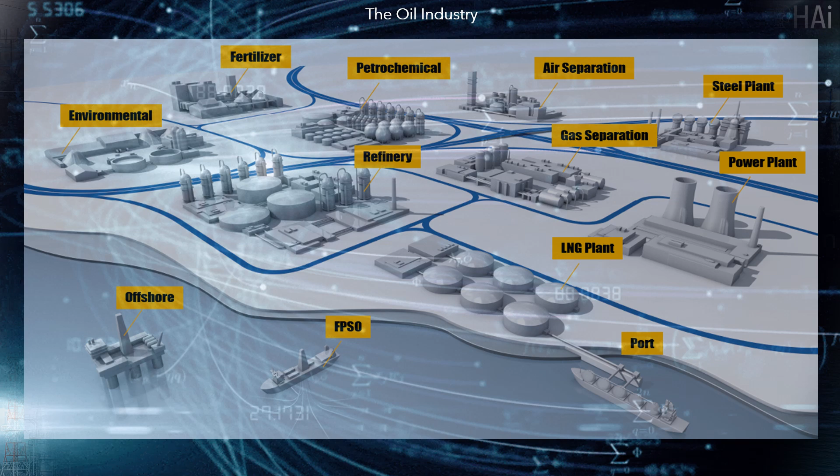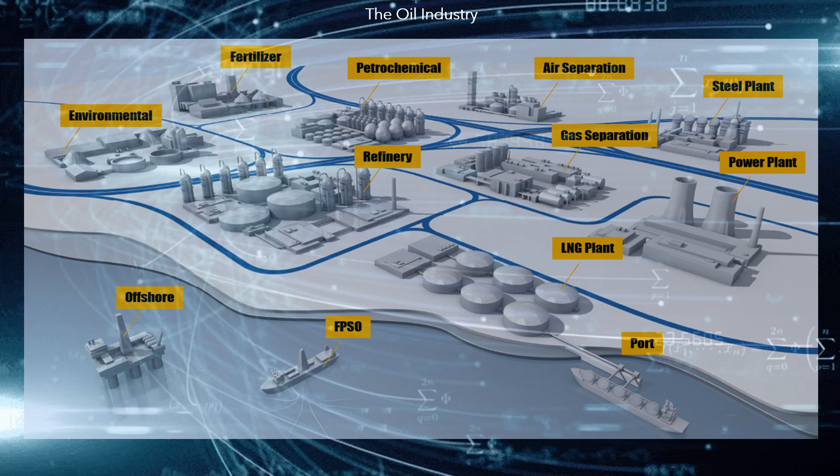Oil Supply Chain Optimization: the oil industry includes global processes of exploration, extraction, refining, transportation and marketing of petroleum products. The largest volume products in the industry are fuels, natural gas, fuel oil, and gasoline. However, petroleum is also the raw material for many chemicals, including pharmaceuticals, solvents, fertilizers, pesticides and plastics.

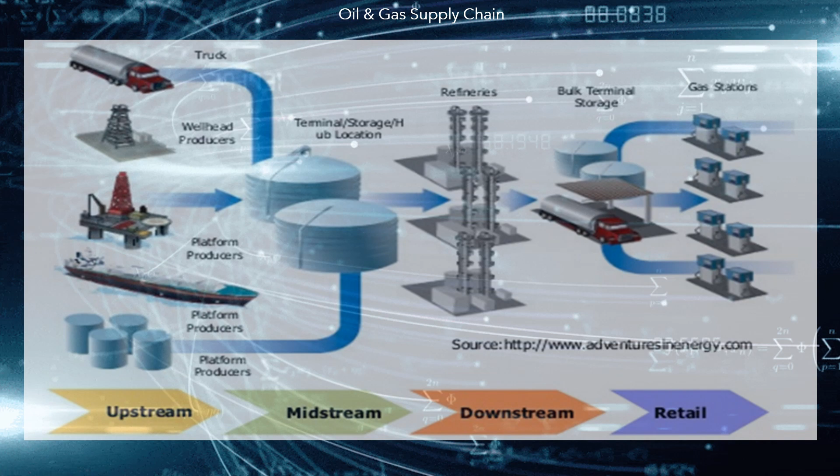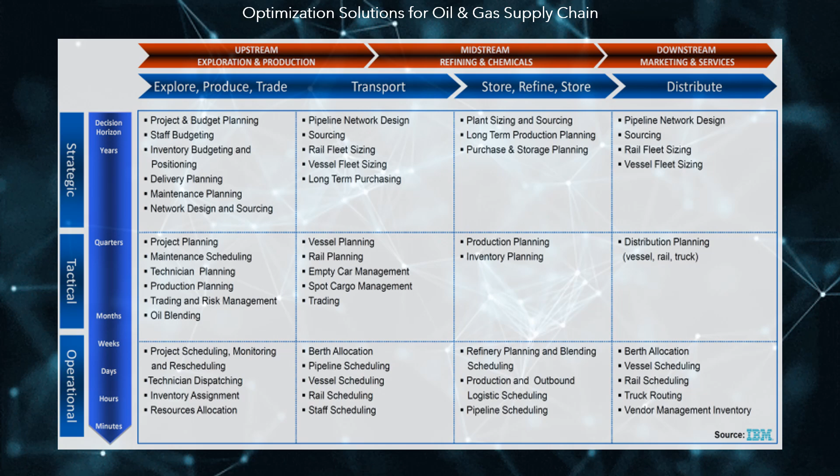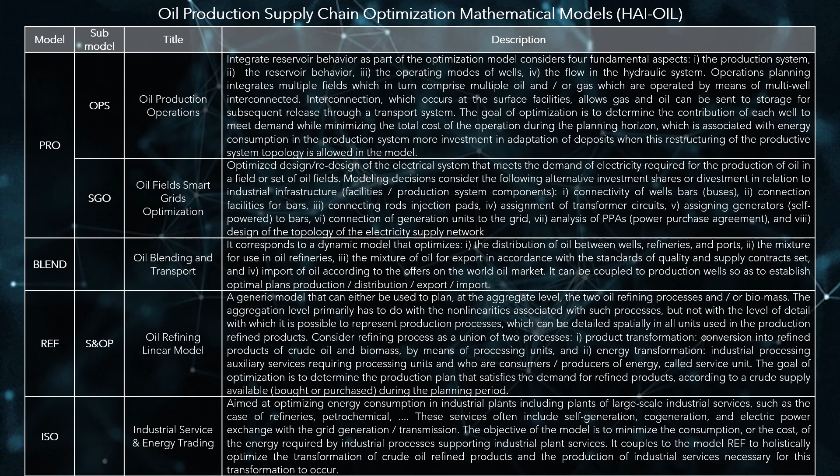The oil and gas supply chain is made up of four links: upstream, midstream, downstream and retail. The links are connected by multimodal transport networks. The table, elaborated by IBM, shows a summary of the optimization solutions for oil and gas enterprises. Oil supply chain optimization meets all the software solutions developed by HAI, in different areas of application of mathematical optimization models, oriented to planning and to scheduling operations in different businesses of the petroleum product supply chain.

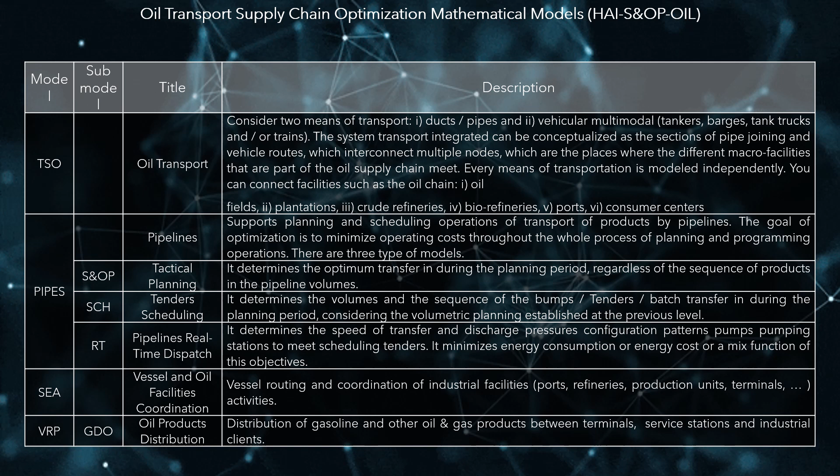The table presents a summary of the oil production and transformation mathematical models developed by HAI. The table presents a summary of the oil transport mathematical models developed by HAI.

Oil Enterprise-Wide Optimization integrates mathematical models for each of the links in the oil supply chain, in such a way to manage the planning of the supply chain with a holistic vision. The design of HAI Oil EWO was the result of work done for a multi-business oil company. The union of models, and their coordination, forms the hypothalamus of an oil enterprise.

Oil and Gas Production Optimization integrates reservoir behavior as part of the optimization model. It considers four fundamental aspects: production system, reservoir behavior, operating modes of wells, and flow in the hydraulic system.

The objectives of optimization models depend on the planning horizon, and can be divided into: real-time advanced control and scheduling for short-term production optimization; medium-term field optimization for strategic operations planning; long-term planning for reservoir recovery optimization; and strategic investment planning and portfolio optimization in oil exploration and production.

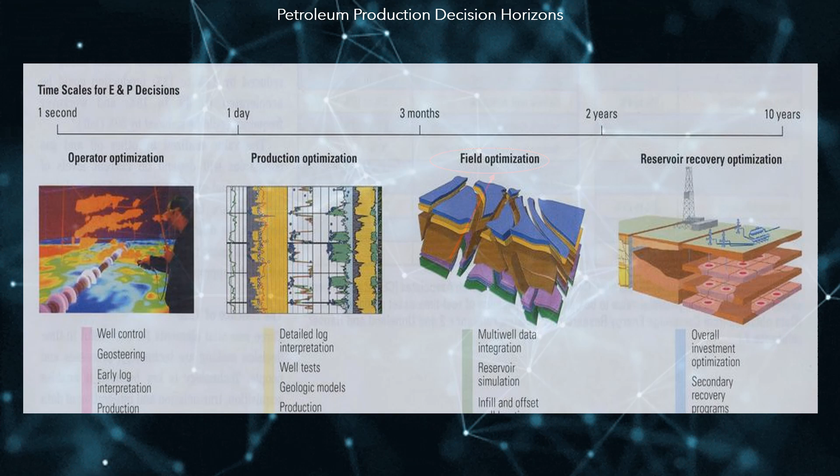Operations planning integrates multiple fields, which in turn comprise multiple oil or gas wells, operated by means of interconnected multi-wells. This interconnection, which occurs at the surface facilities, allows gas and oil to be sent to storage for subsequent release through a transport system. The goal of optimization is to determine the contribution of each well to meet demand.

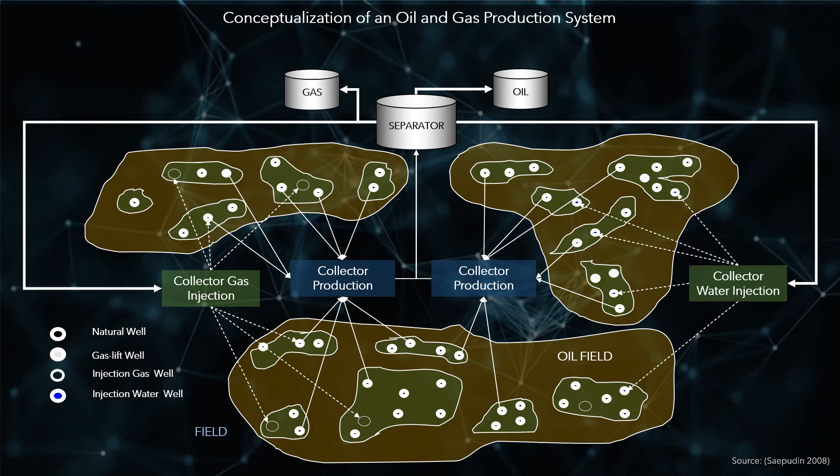This is done while minimizing the total cost of the operation during the planning horizon, which is associated with energy consumption in the production system, plus investment in adaptation of deposits, when restructuring of the productive system topology is allowed in the model.

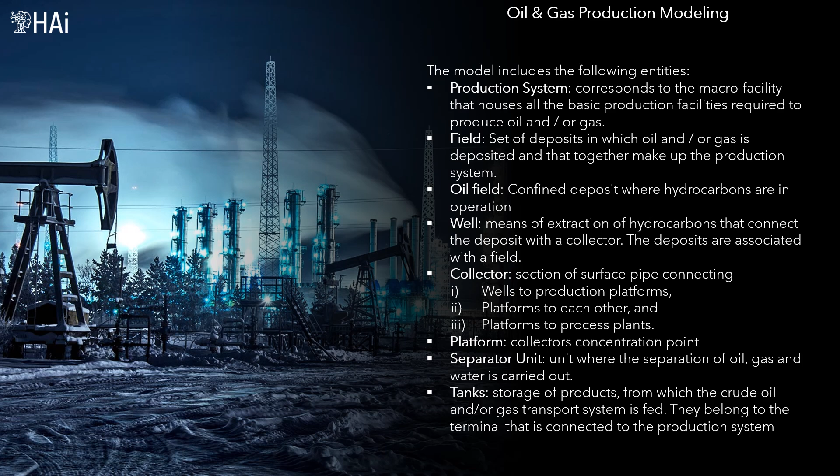The model includes the following entities: production system, field, oil field, well, collector, platform, separator unit, and tank.

For the modeling of the hydraulic system, reservoir plus surface facilities, it is assumed that the production of a well remains constant during each period, and that its production capacity is restricted by several factors: reservoir dynamics, energy conservation, and matter conservation, as well as the behavior of the pressure at the wellhead with respect to the reservoir, characteristics of the well pipe, and characteristics of the pipe of the collectors.

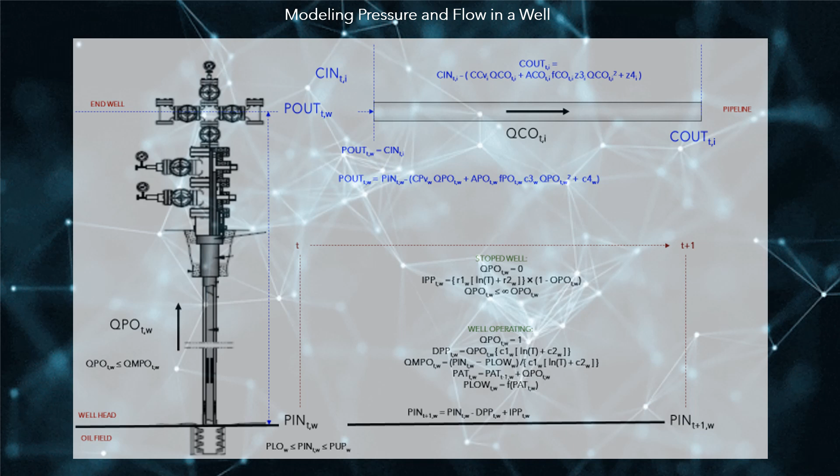The central variables of the modeling represent the flow in the wells and the flow in the collectors. This flow may be multi-phase, in the case of crude oil deposits, and single-phase in the case of gas fields. The diagram summarizes the connectivity of the mathematical elements that allow modeling the well, in the aspects related to the pressure and flow of hydrocarbons, along the hydraulic system that is part of the production system.

E&P portfolio optimization is based on the capitalization of knowledge, of the interaction between potential projects and existing projects. The aim is to obtain most of the answers required for an optimal decision-making process, so that decision-makers can answer, among others, the following questions.

Is it possible to obtain an expected level of return on investment, without incurring serious cash flow risk? How much can we invest in a new project, given the current structure of the investment portfolio?

How do oil-oriented projects affect, in contrast to gas projects, the price risk associated with the investment portfolio? How does global political instability affect the risks associated with the investment portfolio?

Analytical models will help directly in the solution of questions like the above, once decision makers become comfortable with the holistic perspective supported by the mathematical quantitative risk analysis.

The mathematical models that may be integrated are: optimization of E&P investment portfolio, design of oil production networks, and oil and/or gas production optimization. Smart grids and oil production fields optimization is a new activity of the oil industry.

The technical economic viability of energy storage, coupled with the proliferation of renewable energy sources and technologies, has changed the landscape of the industrial sector, since it is now possible, and increasingly efficient, to generate renewable energy and store it for use in due time.

The industrial energy efficiency strategy implies two stages. Offline optimization, planning, is integrated by 3 steps. First, redesign the energy supply system.

Optimize the industrial process in the plants using complex mathematical models, and integrate the planning and scheduling of the industrial process, matter transformation, with the industrial services, energy transformation, including the transactions in the energy markets using optimization models.

Integrate the planning and scheduling of the industrial process, matter transformation, with the industrial services, energy transformation, including the transactions in the energy markets using optimization models.

And online optimization, operating, that includes 3 steps. Use an optimization model for pre-dispatch the energy system, 24 hours in advance. Use models oriented to optimum control in real time, dispatch of energy system, and short-time energy trading and risk management.

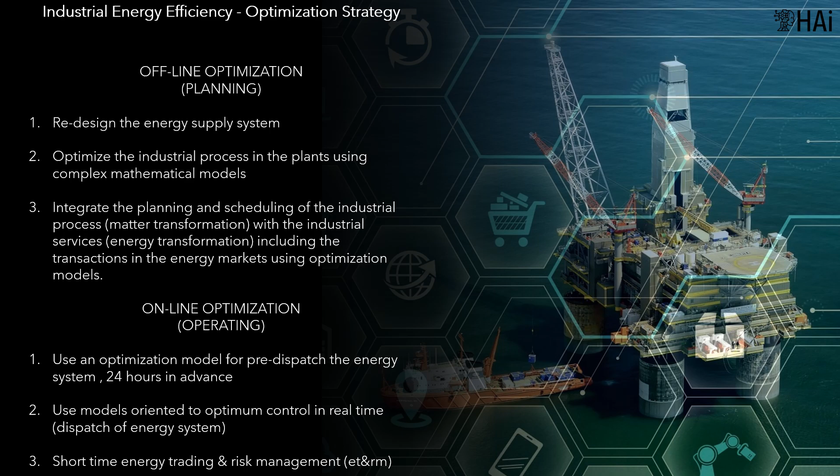Oil transport, trading and blending optimization corresponds to a dynamic model that optimizes oil distribution between wells, refineries and ports, the oil mix for use in refineries, the mixture of oil for export in accordance with quality standards and established supply contracts, import of oil according to offers in the spot global oil market, and import/export of oil according to offers in the oil derivatives financial instruments.

It can be coupled to the production of oil fields, in such a way as to establish optimal plans for production, distribution, export and import. In addition, blending processes extend to petroleum products, for example, lubricants.

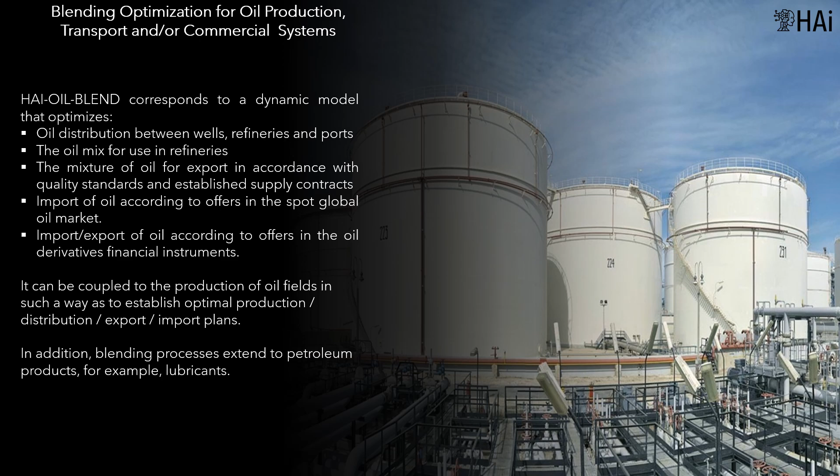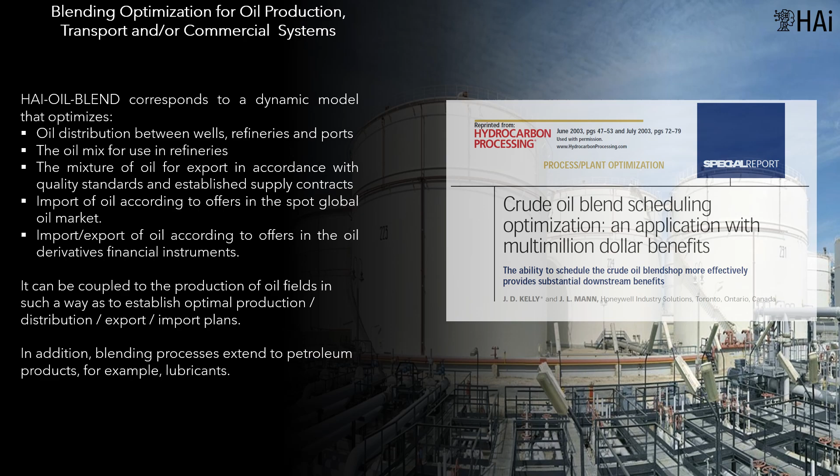It can be coupled to the production of oil fields, in such a way as to establish optimal plans for production, distribution, export and import. In addition, blending processes extend to petroleum products, for example, lubricants.

Oil refining optimization includes a generic model that can serve interchangeably to plan the crude and/or biomass refining processes that may be spatially detailed in all units used in the production of refined products.

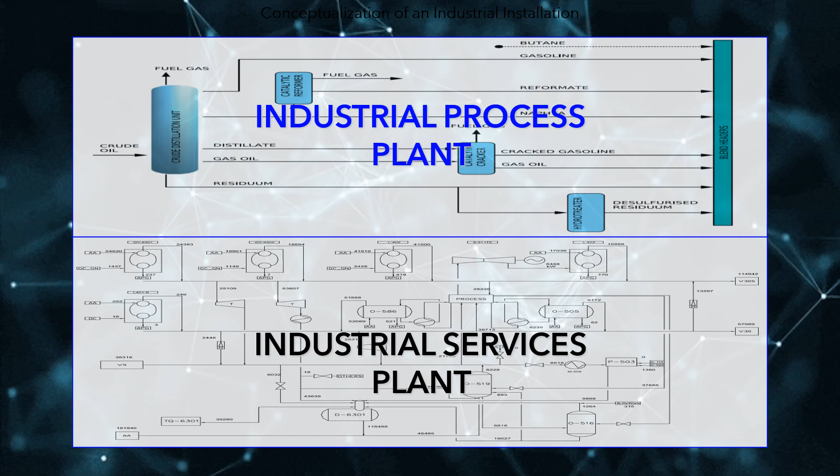Industrial services optimization is the complementary model to the refining model, aimed at optimizing energy management in industrial plants that include large-scale industrial service plants, such as refineries, petrochemicals. These services often include self-generation, cogeneration and the exchange of energy with the interconnected electricity system.

The objective of the model is to minimize the consumption, or cost, of the energy required by the industrial processes, supported by the industrial services plants.

The industrial services system is coupled with the production process model to holistically optimize the transformation of crude oil into refined products. The simultaneous optimization of both industrial production and energy conversion is related to polluting emissions of gases and liquids, associated with increasingly demanding environmental control laws.

HAi may integrate complex industrial process models to redesign the power supply system, according to the new power technologies. This type of model includes the simulation of polluting processes to determine the optimal mixture of fuels, in accordance with environmental regulations.

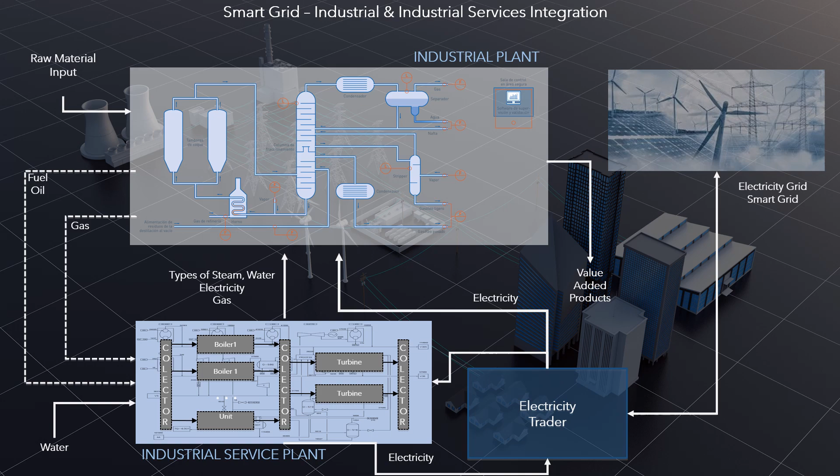Oil transport systems optimization corresponds to a general model, common to all types of oil products, raw, refined, natural gas and biomass, which represents the process for a specific system, including particular equations when this is required.

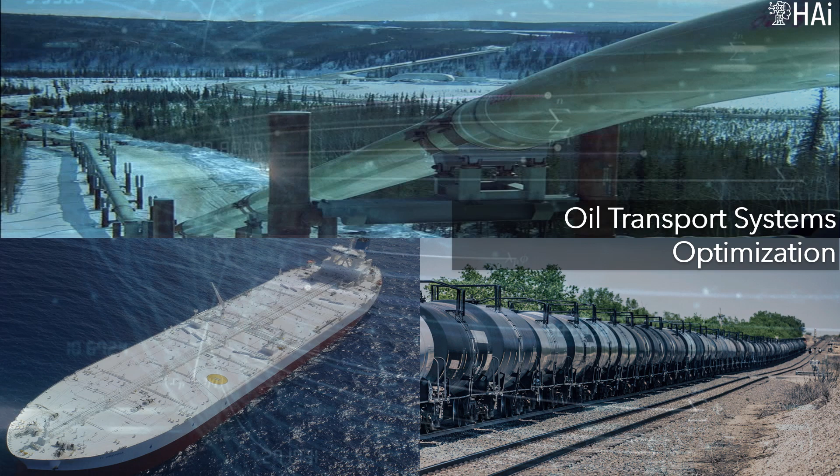It considers 2 types of transport modes: pipes and multimodal vehicle, like vessels, barges, train tanks, and/or trucks tanks. The integrated transport system can be conceptualized as the junction of pipe and vehicle routes, which interconnect multiple terminals, which are the places where are connected the different installations.

Which are the places where are connected the different installations. Each transport media is modeled independently.

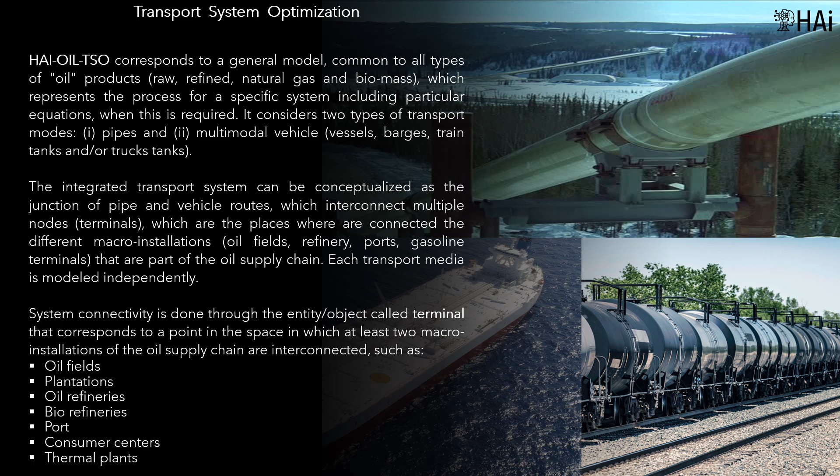System connectivity is done through the terminal, a node, that corresponds to a point in the space in which at least two installations are interconnected, such as oil fields, plantations, oil refineries, biorefineries, port, consumer centers, and thermal plants.

HAi supports the planning and scheduling of oil products transportation, through pipelines using three coordinated hierarchical models. Tactical planning determines the optimal volumes to be transferred in during the planning period, without considering the sequence of products

in the pipelines. Batch scheduling determines the volumes and sequence of tenders to be transferred in during the planning period, considering the volumetric planning established at the previous level.

And real-time optimization determines transfer speeds, discharge pressures, and pumping patterns, serial or parallel, at pumping stations, to meet batch scheduling established at the previous level.

The optimization goal is to minimize operating costs throughout the entire planning and scheduling process. The real-time models include non-linear modeling that determine the amount of energy consumed based on the flow of products in the system.

In aggregated models, when multiple types of products can be transported in the pipeline, the total transport time must be divided into the time used to transport each type of product at different transfer rates.

To represent the flow of energy through the transport system, the following constraints should be considered: energy conservation in the ducts and nodes of the system, minimum pressure limits or compression at the outlet of the ducts, and pressure or compression minimum input to the ducts, depending on the type of connection between the operational area, node, and the duct.

Similarly, like oil, the natural gas supply chain may be modeled as a mathematical model to simulate the transportation and storage of natural gas. The optimization model includes the following types of nodes.

Production fields, consumption centers, natural gas demand nodes discriminated by demand sector, among which are industrial, vehicular, electricity generation, commercial, and residential, and ports and terminals that can receive and/or send LNG. It is associated with liquefaction and/or regasification plants.

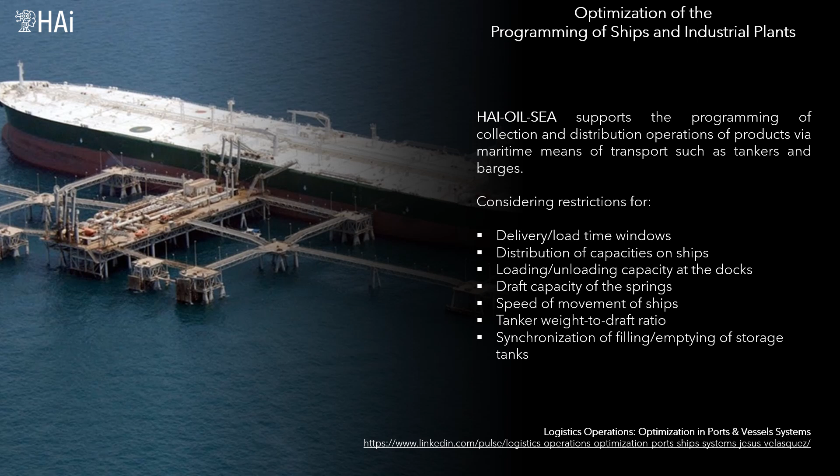Vessel scheduling optimization supports the programming of collection and/or distribution operations of products via maritime ways, in tankers and barges. It considers restrictions for delivery and load time windows, distribution of capacities on ship, loading and unloading capacity at the docks, draft capacity of the pier, speed of movement of ships, tanker weight to draft ratio, and synchronization of filling or emptying of storage tanks.

Planning and scheduling of bulk port terminals. The objective is to minimize the terminal operating cost, considering the system environment, which may include the fuel cost of ships. Managing bulk ports and ships becomes part of the industrial process, since it defines the supply of raw materials and the distribution of finished products that are related to industrial operations.

Depending on the specific case, it must be coordinated: the arrivals with consumption in industrial plants, the departures with production in industrial plants, and the storage levels with the output of material. The optimization may affect the industrial process's speed and the ship speed.

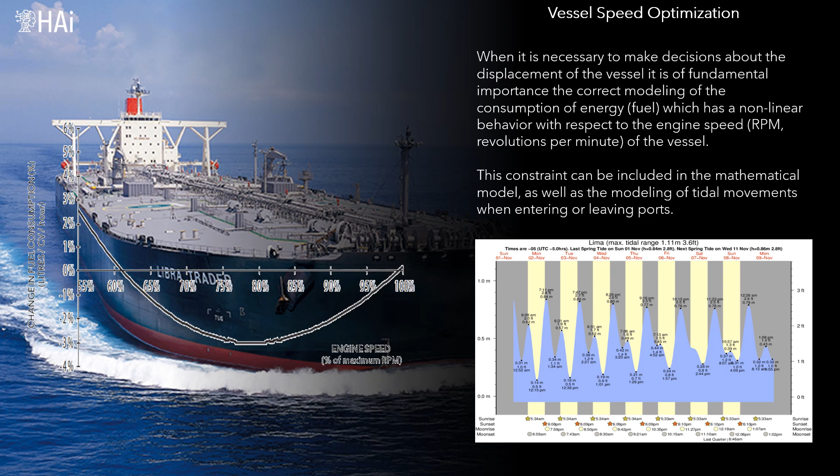When it is necessary to make decisions about the displacement of the vessel, it is of fundamental importance to correctly model the consumption of energy, which has a nonlinear behavior with respect to the engine speed of the vessel. This constraint can be included in the mathematical model, as well as the modeling of tidal movements when entering or leaving ports.

Oil product distribution optimization supports the scheduling of gasoline distribution operations, between product terminals and from product terminals to gas stations. It is applicable to several oil products like gasolines, LNG, LPG and others.

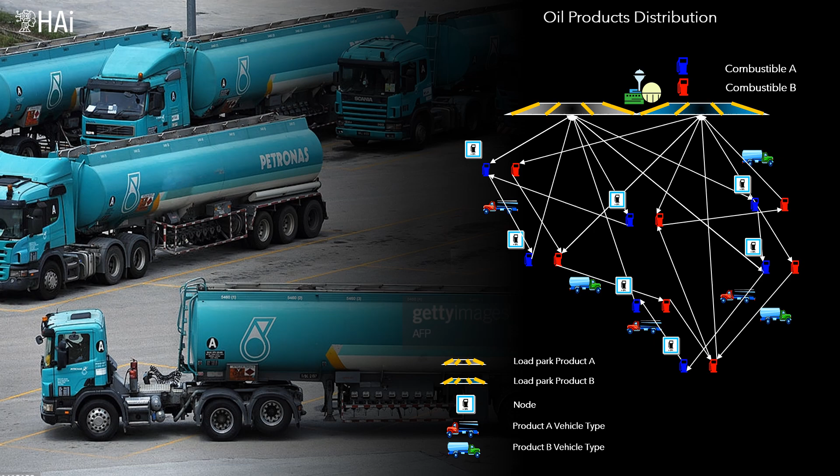The entities of the model are terminals, tanks in the terminals, loading points, service stations, trucks, and drivers. This covers the distribution of gasoline and other oil and gas products between terminals, service stations and industrial clients.

A mathematical model of distribution of petroleum products or similar should consider the following constraints: delivery time windows, tank trolley capacity, distribution of tank trolley capacities in multiple compartments, product availability at service stations, product availability at terminals, load capacity of cargo islands, fillers, work shift, and driver assignment.

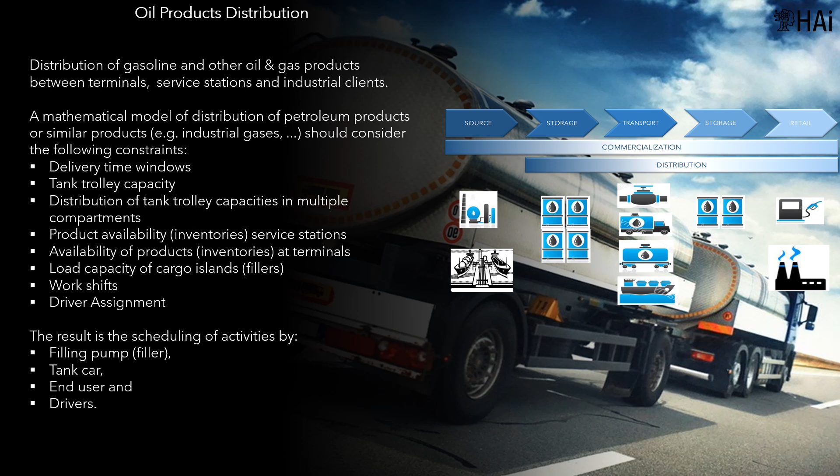The result is the scheduling of activities by filling pump, filler, tank car, end user and drivers. For a large distributor, the mathematical model may include transport between terminals, and the connection of terminals with other facilities, such as ports and refineries.

Maintenance of oil and gas assets optimizes industrial asset maintenance decisions, considering the equipment operating characteristics and life consumption dimensions prior to next maintenance. It implies the coordination of maintenance resources maximizing its marginal revenue. The idea is to integrate maintenance restrictions into the tactical models.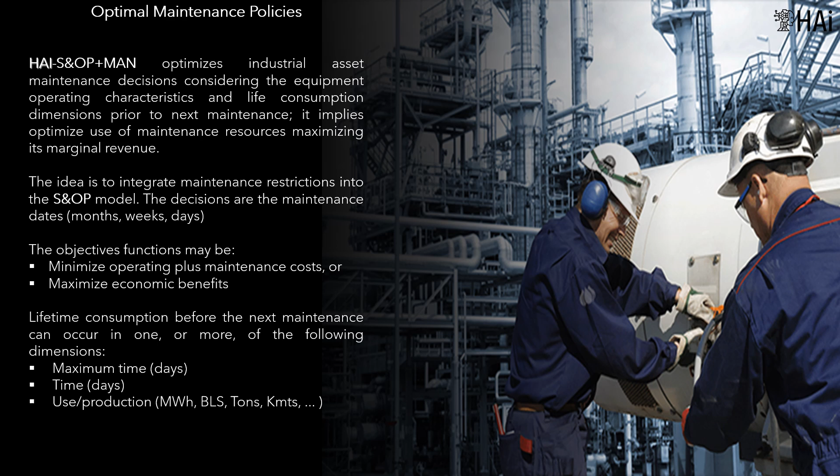Dry docking maintenance scheduling implies the efficient scheduling of ship maintenance that requires dry docking as a vital component in the overall strategic management of a merchant shipping fleet. When this process is managed well, significant revenue and efficiency gains can be made.

Like Herbert Simon, Hypatia artificial intelligence believes that computer-based mathematical modeling is the greatest invention of all time. Thank you for your attention.